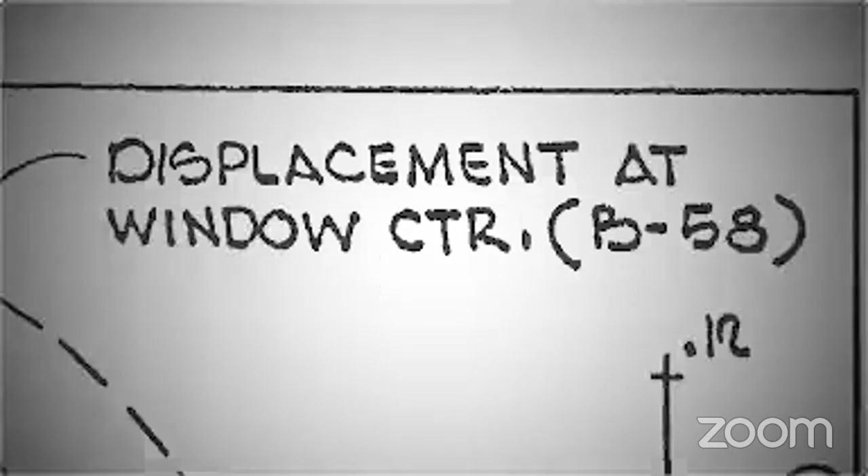When I walk, I've just kind of been picturing our aircraft and what it would be like, just blasting through this big valley that I get to look at. And yeah, it's exciting and it carries with me, and I can't hardly turn it off.

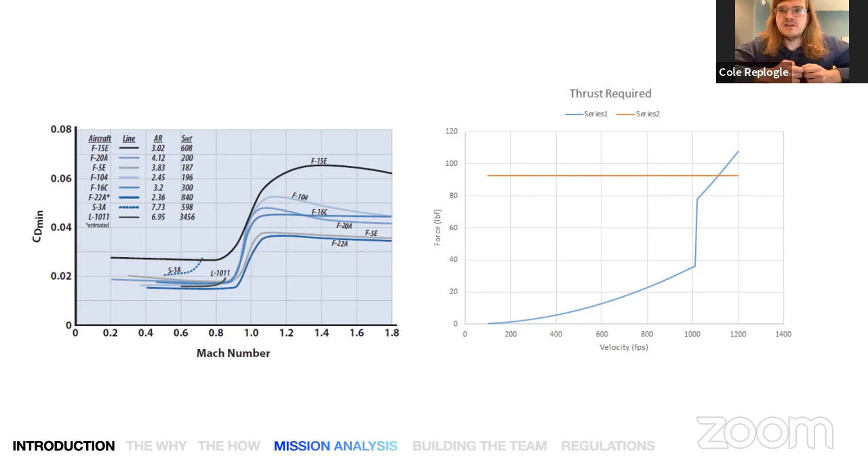So I scoured the internet, made a long spreadsheet of every engine that I could find. No, there's not a commercially available option that can get us through the sound barrier. But I found initially, if we got a 50% increase in thrust, we could potentially do it. Obviously, there's a lot of assumptions that go into that number. But with all that being said, I decided, and Colin decided as well, that it was close enough for it to be worth our time.

And it's going to be a really interesting project to give it an attempt at. So the next thing to do was set up our project goals, the timeline, and what are the major milestones we need to hit. So you can see on this next slide, Colin and I sat down and did a really preliminary Gantt chart, back in May.

Some major things were to figure out what our aircraft drag is going to be, having a team dedicated to that, having an open-ended research project as far as how much extra thrust we could get out of one of these commercial off-the-shelf engines, figuring out the structural design, and so on. Initially we planned to have the initial aircraft design finished by August 21st, this week, so we could have the bulk of the work done prior to people going back to school and presumably having a drop-off in attendance and availability.

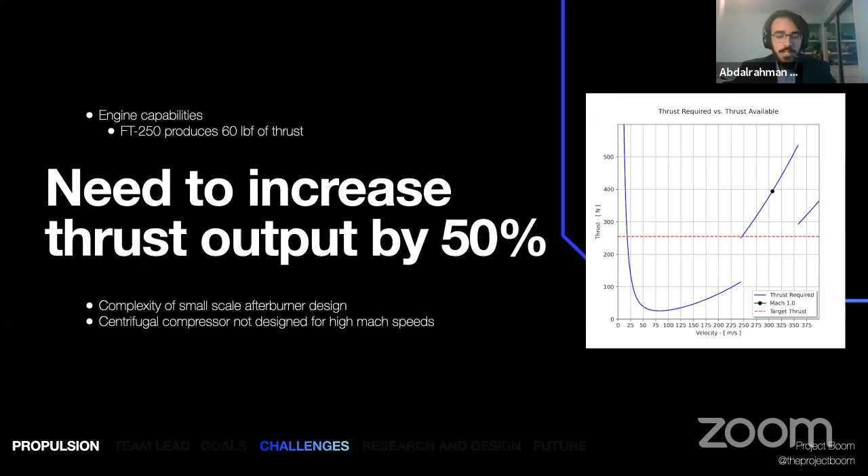Some other issues or concerns we've found in designing the aircraft: the complexity of designing a small scale augmentation system such as an afterburner, and fabricating some of these complex components may be difficult with our current abilities. Additionally, UAS engines usually use a centrifugal compressor, which isn't really designed for high Mach speeds. If we don't address these challenges, we may literally become project doomed.

Looking at some of our preliminary designs to answer these challenges, this summer we came up with designs for the aircraft inlet, exhaust nozzle, afterburner, and an integrated rocket augmentation system. For the inlet, we went with a pitot inlet and S-duct, with the goal of slowing down the flow for the compressor so that it can operate well. We also designed an optimized nozzle using engine performance analysis, as well as simulation with computational fluid dynamics.

Another thing we've done is design a simplified afterburner, shown down there. We did this by performing a rudimentary engine performance analysis. We went with a relatively simple design, just because scaling down a full-size afterburner isn't possible, and there'd be too many complex components that we deemed unnecessary. We'll go with a system where we start simple, and if there are any needs or issues that need to be resolved, we will add those on as testing progresses.

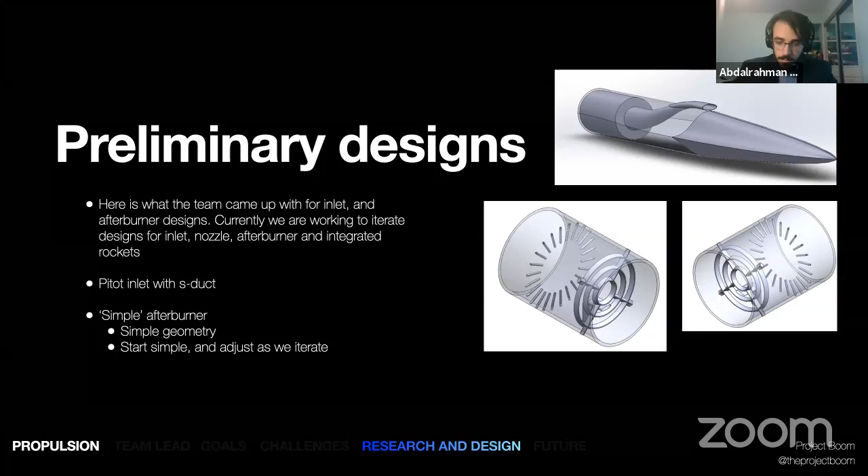So our next steps: with a detailed design of our afterburner coming soon, we'll be transitioning to a more testing phase. As you can see to the right here, we have our humble testing stand with a King-Tech K70 engine. We'll be using a K70 engine because, as Cole mentioned, we were able to acquire funds to purchase this engine, and it will serve as a proof of concept for our afterburner. This will show us if it's even possible for us to get a 50% increase in thrust for any engine.

We'll also be working with industry professionals to improve and define our afterburner design, and to ensure that we have a reliable system that can accelerate our aircraft past Mach 1.

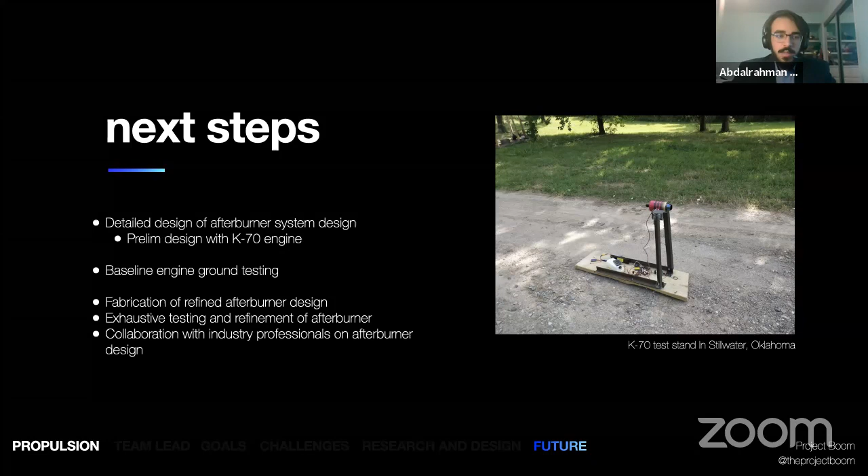Okay, so my name is Johnathan Burgess. I've had a little bit of connecting difficulty, so may have to deal with that, apologies in advance. But I just recently graduated from Oklahoma State University with Cole Replogle and Mann Mansy with a Bachelor in Science degree in Aerospace Engineering, and also got one in Mechanical while I was there.

I'll be returning, I'm actually at OSU right now, returning this week to get my master's degree at OSU, continuing what we started on our senior capstone project, working on turbo electric propulsion systems. So for Project Boom, I'm the aerodynamics lead, basically over sizing the aircraft and the overall shape of it, and figuring out how that shape interacts with the airflow.

On a personal level, I enjoy hanging out with my kids, surfing, being outside and with family as much as I can. I've got a 6-year-old boy and a 2-year-old girl.

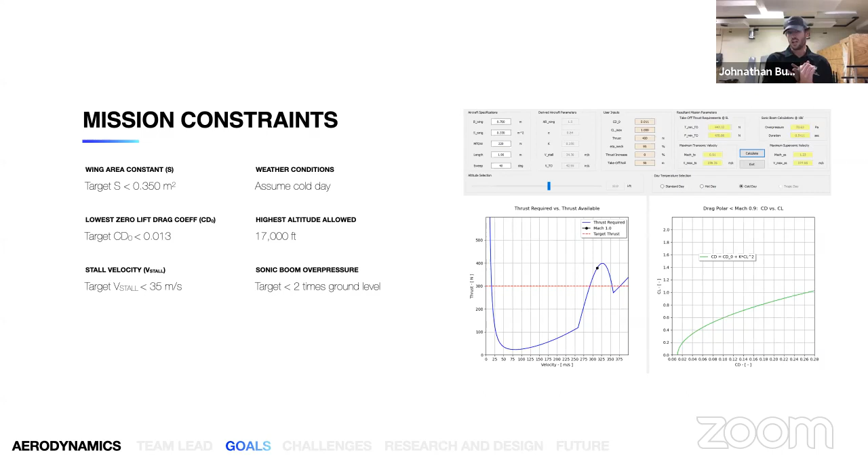So from there, next slide please. This is just a validity check, where we try to look at the mission constraints and the mission analysis from a couple of different standpoints. This is a mission constraint diagram using some of the same values that Cole and I ran as a sanity check, and everything checked out.

As you can see, we have an insane maximum climb rate of 6,000 feet per minute, but I think we have like a 2-to-1 thrust to weight ratio, so that can kind of be expected. So yeah, that all checked out, everything looked good.

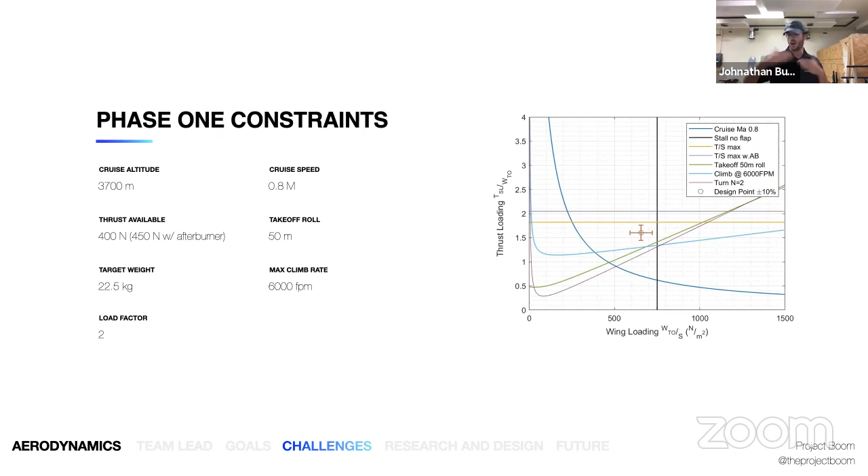From that point on, we kept moving forward. And as Cole and Colin alluded to before, there was literally an overnight change in this project, where we went from about 10 people solid to about 100. So when that happened, next slide please, we had to figure out what do we do with all these people and how do we go forward.

One of the first things we did as a project was come up with Aero Bid 1, the aerodynamics first bid. We took about 40 new members and split them into 4 different groups, about 10 per group, and gave them 4 different design concepts to come up with in about a week.

There was a subsonic design and 3 supersonic designs. Up to this point, all we had was preliminary sizing and literally a drawing on paper. After a week and a half, the 40 new members had worked on 4 separate concepts, and we immediately had 7 different concepts to choose from, with all their corresponding CAD files. So we went from a drawing to, 9 days later, having 7 different concepts to down-select from, which was a really great problem.

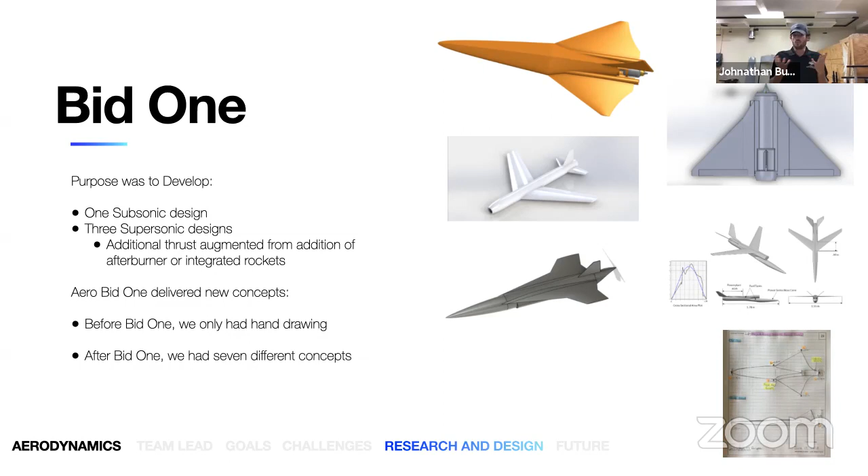Immediately we had 2 or 3 things we couldn't choose between right off the bat. We took 2 of those and started to massage them around in the supersonic profile, and also kept looking into some of the subsonic stuff. You can see the progression from the hand-drawn drawing to the 4 bids I mentioned, and from there we took the Bravo and the Charlie as our favorites for the supersonic design.

From there we started to look at different turbine options, a 250 thrust turbine as well as a 400, and the resultant aircraft size and fuel capacity requirements. Right now we've decided on the B250 as our first phase. We've carried over a lot of work from both options, since they're basically the same aircraft, just intended with different thrusts, different power plants.

So here we are at phase 1. As Cole and Colin have already mentioned, phase 1 is meant to be a subsonic proof of concept. We're going to prove our concept up to basically Mach 0.8, making sure it can fly and survive the transition through the transonic stage and back down. For phase 2, we'll take basically the same aircraft and, if we have to scale it up, add rockets or an afterburner, try to go supersonic.

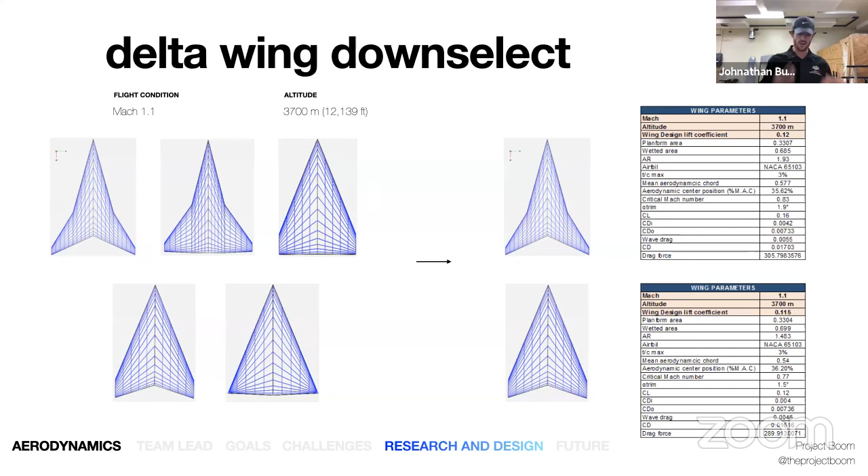Once we had the wing and the fuselage chosen, we started to integrate them together. One thing you need to adhere to, or at least take note of, if you're trying to go through the sound barrier, is what's called the area rule, and your adherence to the Sears-Haack curve as an example.

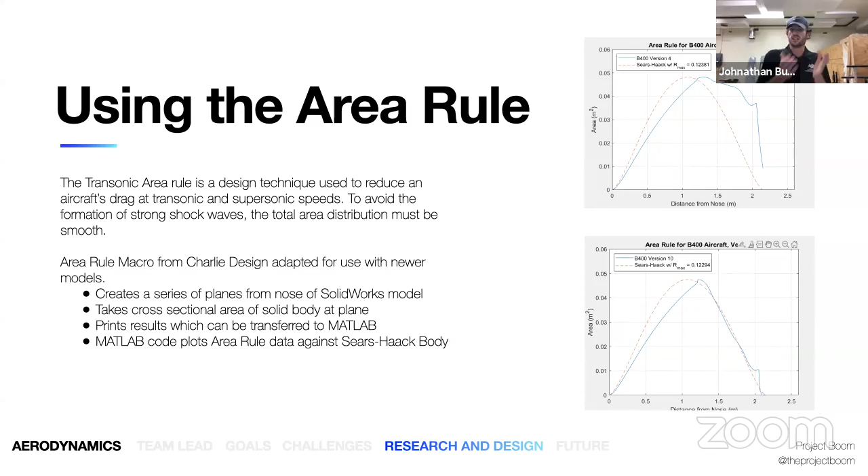A couple of our members figured out, all on their own and completely unprompted, how to create a macro that works with SolidWorks and MATLAB to plot this, and they've been using it a lot. Great job, you guys. It's an example of something that came from this that's not exactly what we were expecting, but it's a great tool.

One of the things we've been looking at on the aerodynamic side, pairing with the propulsions team, is the inlet design, because there are a lot of different ways we could go with this. One of our competitors, potentially out of Florida, was going to leave their turbines completely exposed to the free stream, and that's probably one reason why they didn't succeed, because when you go through the sound barrier you have to deal with shock waves. If you design the inlet incorrectly, or not at all, you can potentially damage your turbine, stall it, things like that—bad things can happen. But if you design it correctly, you can actually increase performance at your design point.

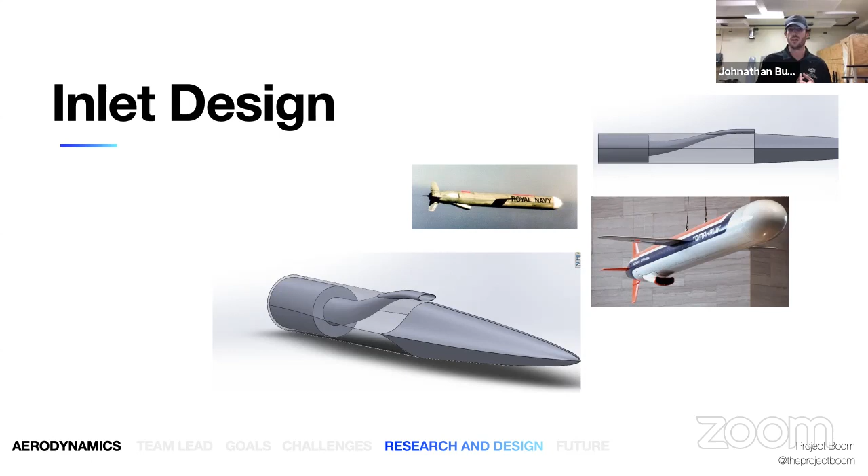So this is an inlet we've been working on, kind of modeled after the Tomahawk inlet. I won't spend a lot of time here since the propulsion side has probably already mentioned this in more detail. I'll just note that we have to adhere to the area rule again with the inlet design, and we also have to worry about the flow through the bird.

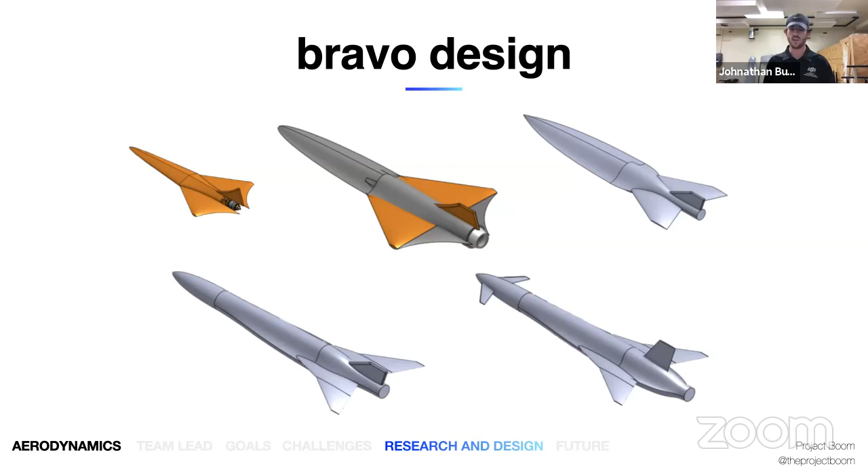Now this is where we're at with our current aircraft—it's been blended again from Bravo and Charlie. This just shows the iterative process. This is a model from our augmented reality team, normally manipulable. Props to them, because we probably won't talk about them much, but we have an augmented reality team that's done really great.

So what's next for the Aero team: right now, tomorrow and tonight, we're starting a foam model build. We're going to take a full-scale, one-to-one foam model and try to fly it to prove out that our V-stall is where it should be, prove out our CG placement, the stability and control of the aircraft, and the maneuverability. We also plan on having our avionics guy come in from Berkeley to try to fly this foam model with an autonomous flight controller, so we can hopefully prove all that out within the next month or so before we go into real manufacturing.

So talking a bit about Stabcon, trying to prove that out through the foam model. Speaking of that, next we have the Stabcon lead, Skyler, who's going to talk about how we're actually going to control this thing.

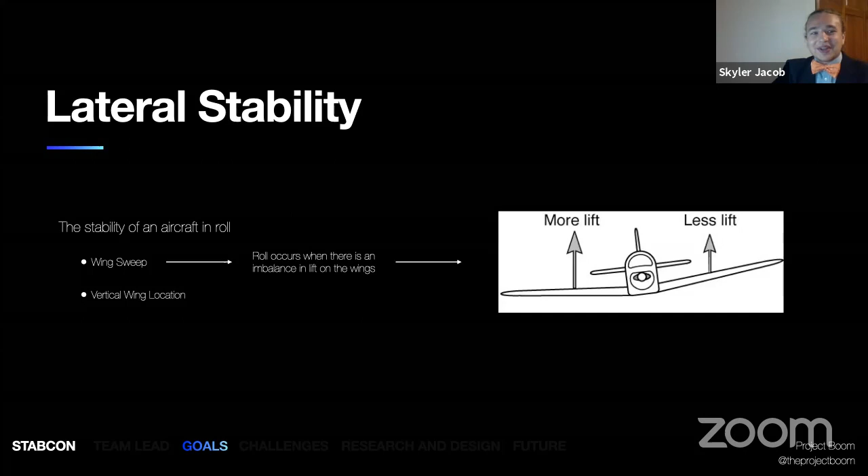Next is lateral stability. This is shown by the image, and it is designed to prevent the aircraft from rolling from one side to the other. While this is not directly related to drag on our aircraft, flying upside down is not really the nominal position, as it puts your lift in the wrong direction. This is often controlled by the wing in order to keep your body facing up by either using sweep, dihedral, or vertical wing location.

The last of our stability sections is directional stability. This is what will keep our aircraft moving straight. This is crucial since an angle of side slip will increase the perceived frontal area of our aircraft. This is achieved by using vertical stabilizers to increase the amount of area on the rear of our aircraft. It's exactly how a weather vane works, using what is called a weathercocking effect.

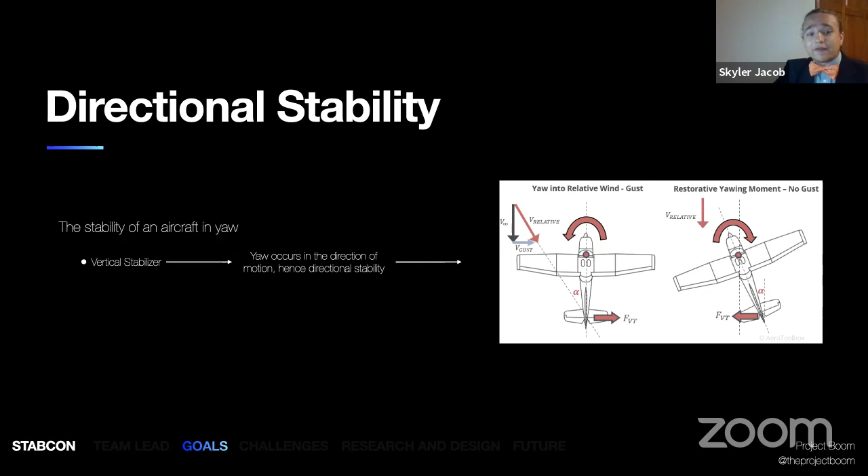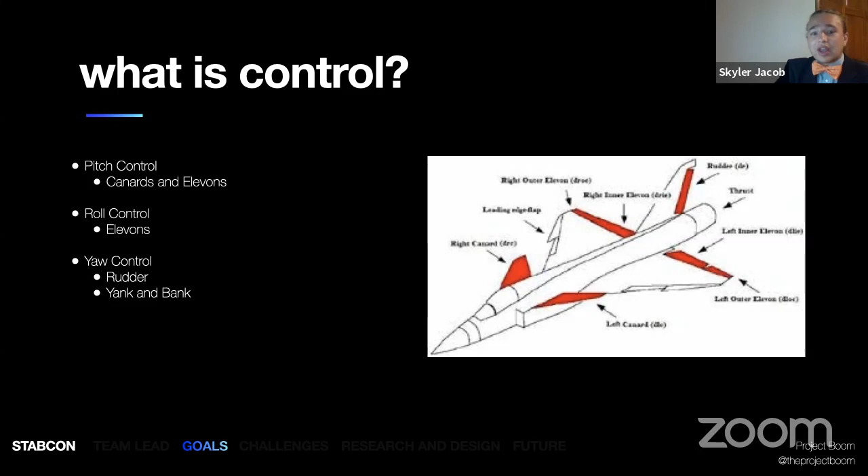The pitch will be controlled by the elevons moving in the same direction, and the angle of attack of the canard. The roll control will be achieved by moving the elevons in opposing directions, while yaw control will either use the rudder, the red highlighted surface on the rear of the aircraft, or a yank and bank maneuver, which is a mixture of pitch and roll to change the direction the aircraft faces.

Those surfaces have been chosen to counteract some of the major problems we'll be having our aircraft see at high subsonic and transonic speeds.

At these subsonic speeds, the aircraft is going to have a high stall speed, which is generally unwanted because stall speed is the speed at which you lose lift over your wings, and your lift does not equal the weight of your aircraft. These higher stall speeds are due to our small wing sizes. This in turn will decrease our control authority at low speeds. This mixes in with the need to keep our static margin positive between 5 to 15% so that we're stable and controllable, as mentioned earlier.

In the transonic region, the aircraft will encounter Mach tuck, which will cause the aircraft to pitch down drastically due to the velocity and pressure differentials over the wing's upper and lower surfaces.

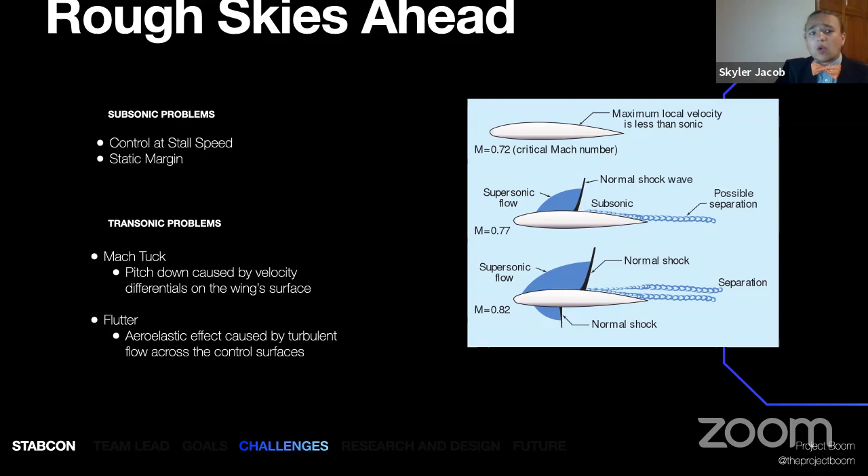This region will also cause and force flutter, which is an aeroelastic effect caused by the turbulent flow over the control surfaces. This can create unexpected forces that will prevent the surfaces from being controlled or even break them from the wing.

This leads us to our chosen preliminary Stabcon configuration. Our aircraft will have elevon surfaces on the inboard of the wing and a control canard at the front of the aircraft. This is pretty similar to how the XB-70 Valkyrie, which is a sick plane just to begin with, if you don't know it, please look it up, where the canard doesn't add much additional lift on the front. That way, it doesn't move our aerodynamic center or our center of lift forward much, as it acts as an all-moving stab.

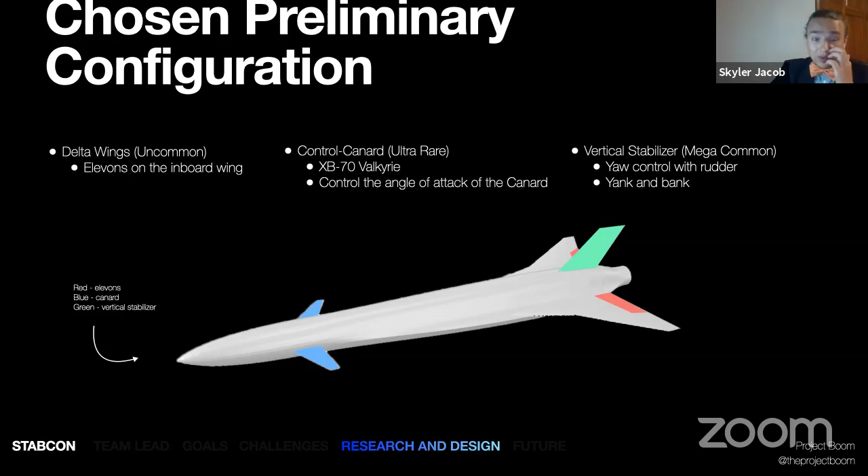That way, it'll change the angle of attack of the aircraft during the transonic region. This will allow us to counteract both Mach tuck and flutter. The final surface is the vertical stabilizer, which will help keep our aircraft facing forward during flight. The direction of flight will either be changed using a rudder or a yank and bank maneuver as talked about on the previous slide.

This leads us to where we need to go as we move on. The largest of these is knowing exactly where our static margin is, because a change in 1 to 2 centimeters of the center of gravity of your aircraft can drastically change how your aircraft moves around in the sky.

This will be achieved by narrowing down the precise location of that center of gravity and using our VSP model and calculators that the amazing team members of the Stabcon team have developed to actually nail down our stabilizer sizes and our control surface sizes. That way we get a good center of lift of our aircraft.

From there, we will choose an airfoil that has a low drag and a low lift for our canard. Then we will design how the control surfaces will be actuated by picking servos and motors to maneuver those surfaces and place them within the aircraft.

After all that is done, we will have to then use our stability derivatives, which is this huge, ugly matrix of numbers, and find those constants for our 5 modes of flight. That way we can give the inertial matrix and aerodynamic characteristics to find our natural frequencies for our aircraft that avionics will have to use later down the line, so they can actually control how our aircraft reacts to some of these air forces.

Now that this roll has come to a stable stop, why don't we turn it over to structures where they can pitch us their plans? Thank you. On to you, Gaurav.

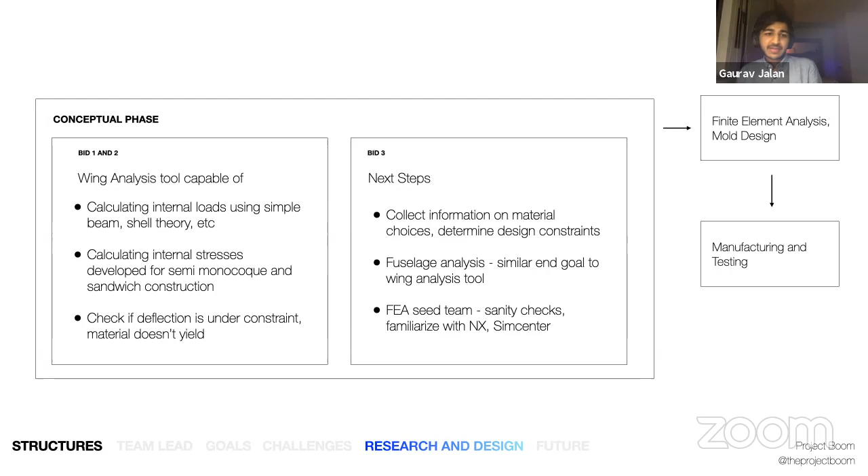Here we have some examples of work done by a lovely team. Starting from the left, we see a V-n diagram made for a previous iteration of Bravo, where we took industry standard margins of safety and ultimate loads into account.

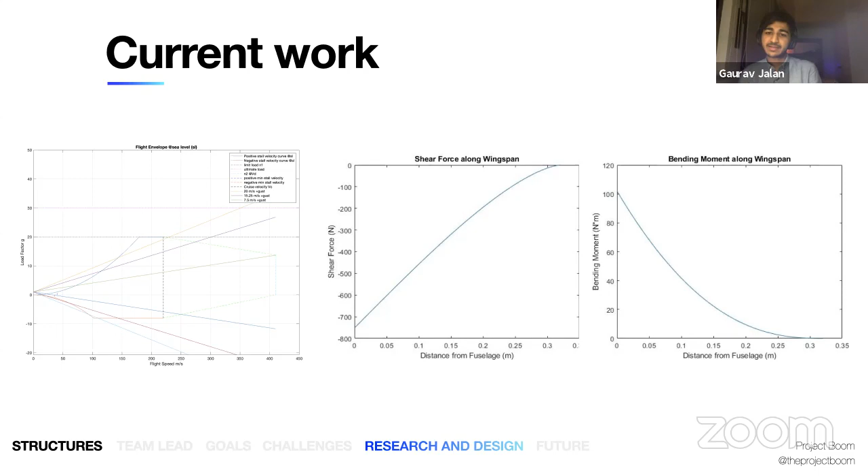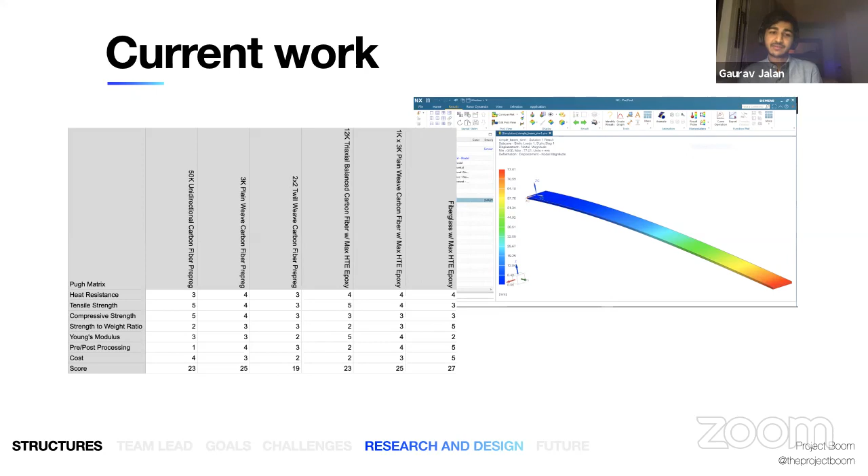The other two are span-wise shear and bending moment produced in the wing, from our MATLAB tool. On the left we also see a decision matrix evaluating our various material choices, and on the right some sanity check FEA done by our bid 3 team.

Finally, some important technical challenges ahead of us. As Skyler briefly touched upon, the unpredictability of loads and vibrations in the transonic region makes for some tricky analysis. FE models, especially with composites and multiple interacting surfaces, are tricky to set up, which is why we have a small team working on reproducing results from existing papers to get a feel for these analyses. Harsh landing options, such as a net capture, which is essentially a high impulse loading case, would also be tricky to analyze.

Next, design of possible retract and control surfaces would be an interesting design challenge due to a high reliability requirement and the scenario of it being used at high speeds. A big manufacturing challenge would be mold design, getting pieces to line up precisely—the molds themselves are very time and resource intensive to produce. And finally, designing tests that give us a good idea of what the performance of the structure will be like in real flight.

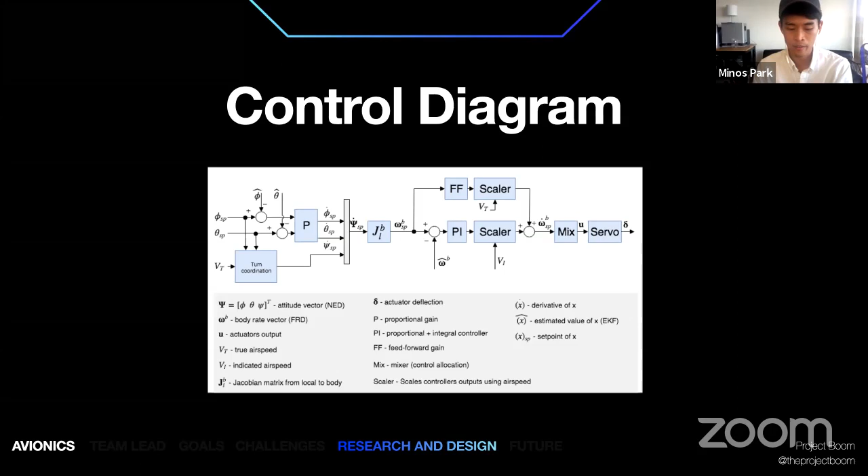However, for a machine, it's a process that involves a state estimator, a controller, and a feedback loop. That's what we use in combination with the sensors to control our vehicle safely and autonomously. In the above image, we reference an attitude controller that we are using for a straight line path section of the mission. Next slide, please.

Based on the information, we've carefully selected components that can nominally perform even in low probability scenarios. For mission critical components like IMU and GPS, we have considered the state estimator convergence and sampling aliasing. The primary IMU for the phase 1 mission is the ADIS 16470 from Analog Devices, which has an excellent data output rate, in-run bias stability, and noise density. For GPS, we have selected a real-time kinematic GPS unit that gives us centimeter accuracy with a ground-based station for RTCM corrections. Next slide, please.

Now, system simulation is useful for a variety of reasons, and for our SLS, it is particularly useful for testing all functional and performance characteristics at the components and subsystem level. For example, we can test the performance of the autonomous controller with simulated sensor data.

A PI at a lab that I work in said a simulation is always doomed to succeed. This is true for our SLS as well. To make the simulation useful, we need to be aware of its limits and know how to improve the physics and simulation fidelity to the degree that we can accept the simulation results.

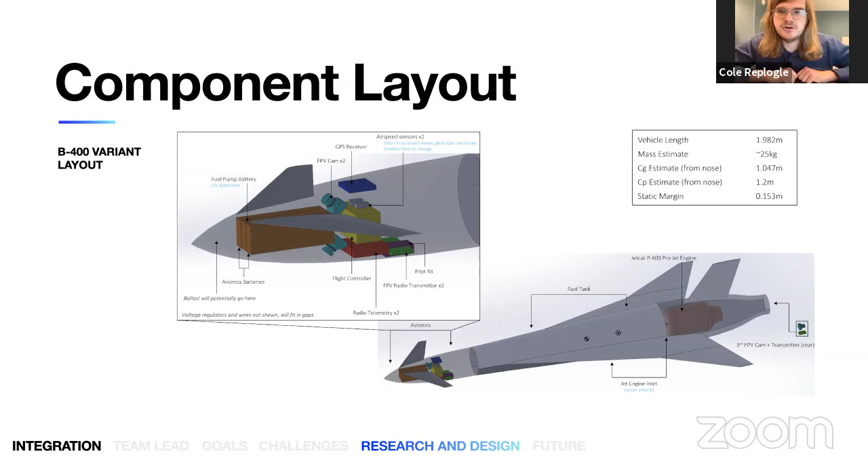You can see here basically the same thing for the B250 layout.

Pretty much looks identical, except if you're really keen, you notice that things are a lot more packed down in the nose here, and there's a little more free space in the B400. That's not necessarily a bad thing. That may mean this variant is a little more tailored to the space that we need.

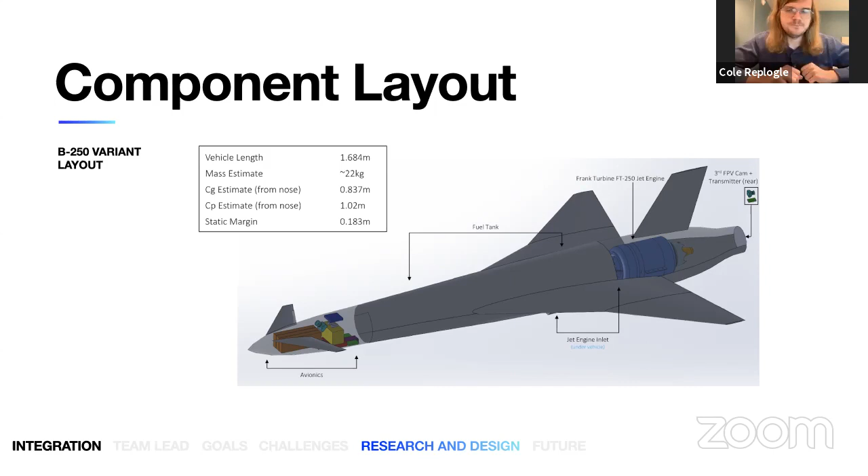So that's where we're at as far as integration for the two aircraft. Takeoff and landing is an active area of research for us, and I think we're converging towards solutions there. Basically it's all a volume and weight game -- if we can externalize our takeoff and landing to the ground, so we don't need to carry a parachute or landing gear, that's preferable. We've looked at a lot of different takeoff options, and we'll likely have way more runway than needed, so takeoff isn't as big a concern as landing.

We've talked quite a bit about how high our stall velocity is, around 35 meters a second -- I wouldn't want to be standing near that personally. So getting that to land with such a high stall velocity has been challenging. I've been looking at nets; Gaurav touched a bit on the structural implications of that. We're still rolling through whether that's feasible or not. A conventional landing gear is generally good, but it adds pounds and takes up space, obviously. A deployable parachute also takes up a good amount of volume, but it's an option we've pursued as well.